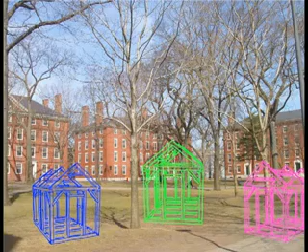All we know about Thoreau's house is that it was 10 by 15 footprint. It had 8-foot posts. Now, when you ask, would Thoreau have done this in a college classroom, when he talked to college students, he didn't say that they should use their hands instead of their heads, but he did say that students should not play life or study it merely, but earnestly live it from beginning to end. And so this is our attempt to follow that.

And when we started this project, we thought it'd be easy. Thoreau only mentions the construction of his house a couple of times in Walden, and mostly refers to the economy, how much the materials cost that he borrowed and asked, but the actual detail of how he put it up was not mentioned. And so we thought that this would be simple. Thoreau could have done it and only wrote about it for a little bit. He was one guy by himself, and we could do it with a class. But we learned rather quickly that that was not the case.

And one of the issues that we face is we're living in a world that Thoreau did not live in. So he went out to Walden Pond, he found his site, he dropped his trees, knowing some construction background. We know that he had some experience building his family house and helping with Emerson's house. We don't have that experience. We have experience with computers.

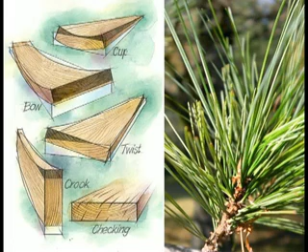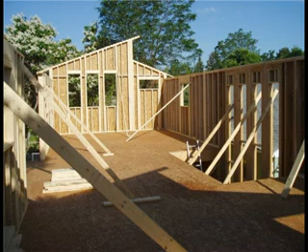Thoreau also used white pine. He used green white pine, which means it's fresh wood. It warps. We will find that out when we put up the timber frame, and it won't be square. But we don't even get the luxury of using white pine. We're using yellow pine, which is almost twice as dense. Now, when we talk about this, we're mentioning the materiality of it all. So we don't have the chemicals that you have to buy to get the precursor RNA, but we also don't have the 2x4s and the plywood.

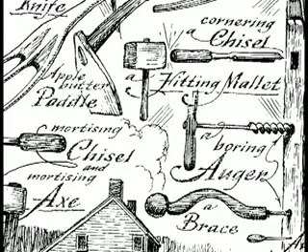Thoreau probably did this in a reasonable amount of time. We've been working on it an entire semester. He may have been able to square his timbers as nicely as this. We have not. But as we go through squaring timbers and learning the tools, that's one thing. But what did he actually build? What were his plans, and what was the structure that he built?

And so when we looked into this, we had to look back at historic American timber framing from the 19th century. We were familiar with the tools. We had Beeler tell us how to work wood in these old ways, but there is no definitive plan on how Thoreau built his house. And even if you look at the replica plans that are provided in Concord, those plans seem a little sketchy. Croft and myself have looked over it. They don't seem right.

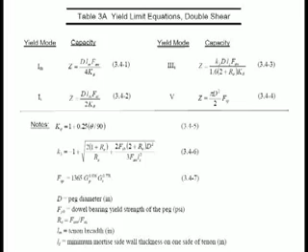Now, being good engineers, we referred to the math that is timber framing, but we didn't, because we're not going to go through this, especially in an LCC course, and we know that Thoreau wouldn't have. He would have had some tacit knowledge, some rule of thumb that he knew when he was building these joints and knowing the stresses and the strains of the material he worked with. We also know that Thoreau would not have used Google SketchUp, but we did, because it's convenient, and when we were coming up with these plans, we tried to figure out what joints would work.

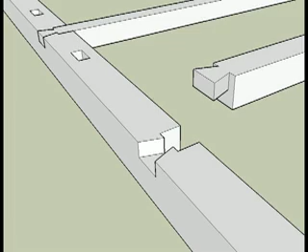We'd like dovetails on the tie beams and the girders to help against tension and compression. When we were looking at the roof system and the rafter system, we looked at examples in the past. We had the purlins to help prevent racking. The joint up top, the half lap, is simple, but what we're still having problems with are these joints down here on the rafters, getting it back to the frame.

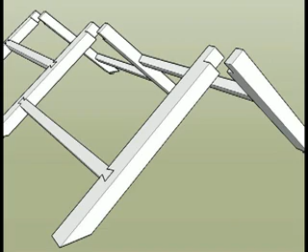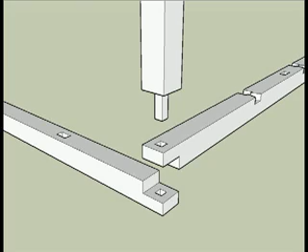And I found out after talking to a friend about my stitches from the adze that she and her dad do timber framing. Her dad's a timber framer. She took a look at these plans. She took a look at the corner joints at the rafter system, and she laughed a little bit, thinking that we were crazy and that this is not the way to do these joints. So while these joints look pretty in SketchUp, we'll probably learn rather quickly that they may not work. So we also have brace joints, and these are nice looking,

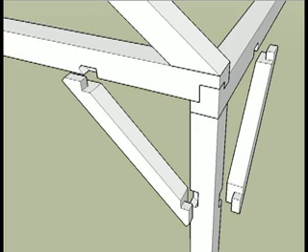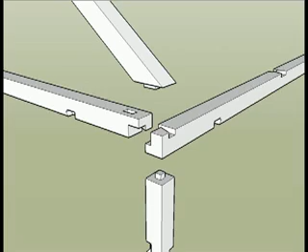Thoreau didn't make this complicated joint. I can guarantee you, and we probably won't make it because it probably won't hold and we don't have that accuracy. But what Thoreau did say in Walden, in one of the chapters, is he mentioned that this frame so slightly clad was a sort of crystallization around me and reacted on the builder.

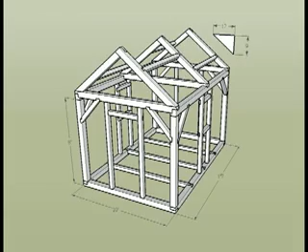And so while we have this frame, this great idea, the 10 by 15 footprint, the 8-foot post, this frame that we're building isn't meant to hold the snow and the load of that during winter. It's not meant to live in. We're using it as a learning tool. And so as we go through this project, this crystallization around us, we realize that maybe it's not what Thoreau would have done, but it is our project, it is our own, and we are learning through it. It just might not be as accurate as we had hoped.

So while the plans we've seen might not have been accurate, our project isn't accurate either to a certain extent. Our site isn't that of Walden, it's outside of architecture where the Solar Decathlon House used to be. There's a construction site opposite, but in this experiment of living, we're having an experiment of learning and trying to figure out